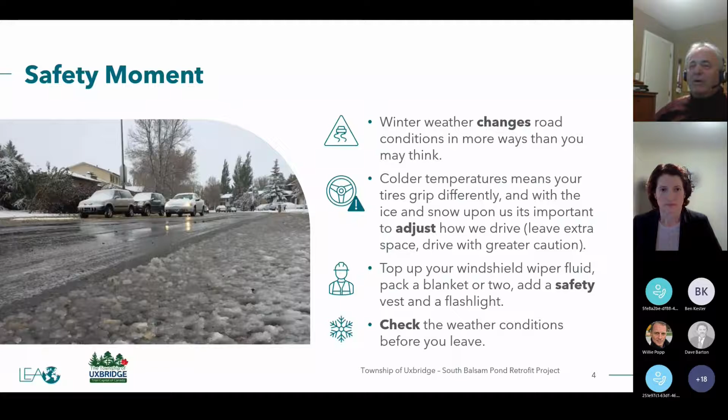So we'll briefly go through the project background, the goals of the project, and a summary of the proposed works. The site is located south of South Balsam Street, east of Turner, and north of the railway corridor and the Uxbridge Brook. There are walking paths through there, and the facilities were built as part of the subdivisions. There are two subdivisions, east and west of Turner, built in the 90s.

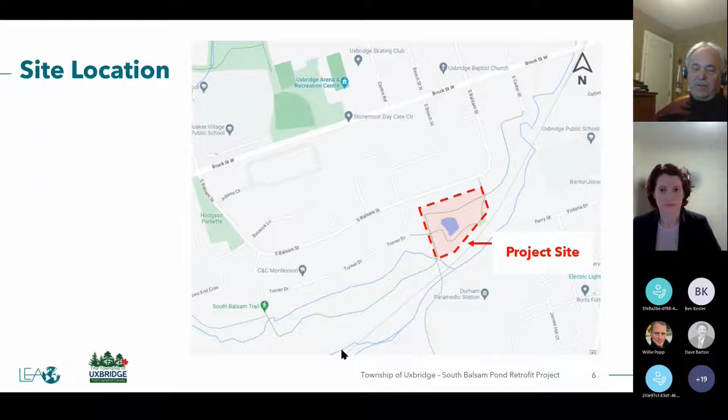So this is the existing condition. There are 3 ponds. Water comes from the subdivisions through the 2 walkways. There are 2 quality ponds, this is one and this is the other. And then there's the stormwater management quantity pond. The gray shows the water level when we did the survey, but it actually covers all this area, so it's quite large. And as said, it was built in the 90s.

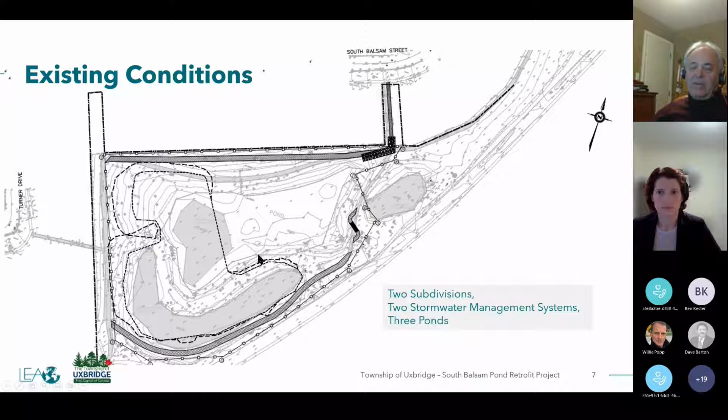A little bit more detail. There are walking trails through the area. There's a little abandoned playground along the rail corridor. The boundaries are the backs of the properties on South Balsam and Turner, and the rail corridor here. The inlets to the ponds are from Turner down the walkway. There's a pipe that goes here. Under smaller storms, the flow goes around that quality pond and then overflows into this larger quantity pond.

And from South Balsam, it comes down the pipe down the walk path and into this quality pond, which then overflows into the bigger quantity pond, and that is released through a pipe up to the Uxbridge Brook. That's the existing conditions.

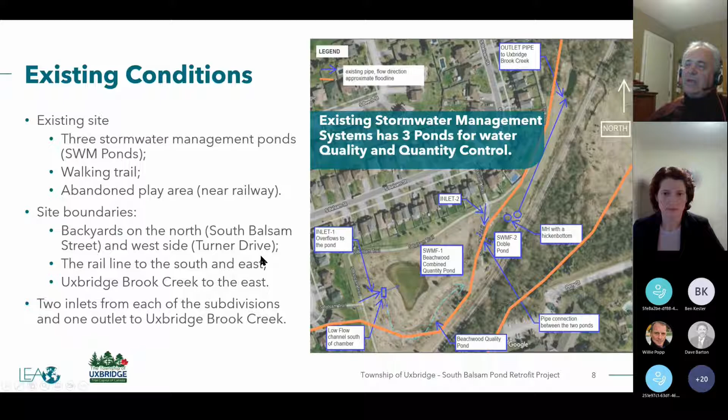So the goal of the project is to improve the stormwater management system, to bring it up to today's standards as things improve in regards to how we treat water for quality and quantity controls. We're also updating the stormwater management facility to reflect climate change impacts: the larger intensity storms, more water, and how we deal with that, while still maintaining the quality of the water before we release it to the brook. And then we have to keep it inside the township's budget.

So I'll hand it over to Christina. She'll go through the project details. Christina? Mark, if you can please give me control as well, just to point out so people can see what we are discussing. Okay, thank you.

So as Mark mentioned, we are designing this new SWM facility to provide a little bit less space than the existing pond. And this is the footprint of the proposed pond. It will take out the space of the existing quality pond, and it will have its own quality control cell on the north and the quantity control cell on the south. The existing inlets will be maintained to a certain extent. The inlet from Turner Drive will be maintained up to the existing chamber just west of the pond. And the new inlet pipe will be connected to the pond quality cell.

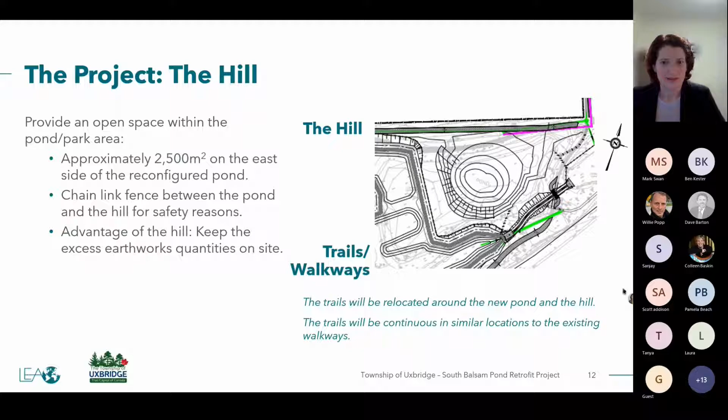The project will also include the addition of a hill on site, and this is located on the east side of the new pond. The area is about 2,500 square meters, and a new chain link fence will be installed on the edge of the proposed pond for safety reasons. The advantage of this hill is that we will keep all the soil that will be taken out in order to make the proposed pond, and all those quantities will remain on site. As mentioned previously, we will relocate the trails, and there will be a continuous path throughout the site with additional areas for the community to enjoy that space. Mark, can we move on to the next one, please? Thank you.

Part of this project, we are bringing in new storm pipes from South Balsam Street as well as Turner Drive, and they will carry the flow towards the new pond. And also a new outlet structure will be placed in order to maintain the allowable release flows into the municipal infrastructure. In addition, all the catch basins in the subdivision, the divide will be south of Brock Street. They will be equipped with catch basin shields. So these are some inserts that will be placed in the catch basins that will capture the sediment. So less sediment will be conveyed further into the pond, and that will result in less cleaning required for the pond and improved water quality. Mark?

Thank you. In terms of environmental considerations, LEA undertook an environmental study to determine what are the species at risk and what the environmental constraints are within the site. And there will be vegetation removal required, and Mark will discuss that further on. But we are expecting about 15 meters of vegetation to be removed beyond the SWM pond footprint, and the vegetation will be restored after construction is completed. In the existing condition, based on the environmental studies undertaken, there were 2 potential species at risk that were identified within the site.

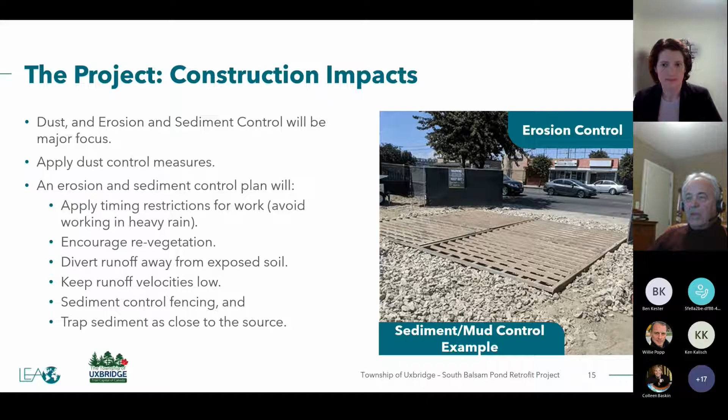And then the perimeter fencing of the whole site will be double fence sedimentation controls with sediment traps to keep everything on site. So the first phase of the construction is the removal of the trees and shrubs, and that has to be done before April, as Christina said, to avoid the breeding season.

This is in regards to the trails. So the trails will be closed at South Balsam, Turner, and then the access points from the abutting trails. There's a number of other access points, not just from the streets, that will also be signed, and they'll be signed in advance so people are aware what's happening.

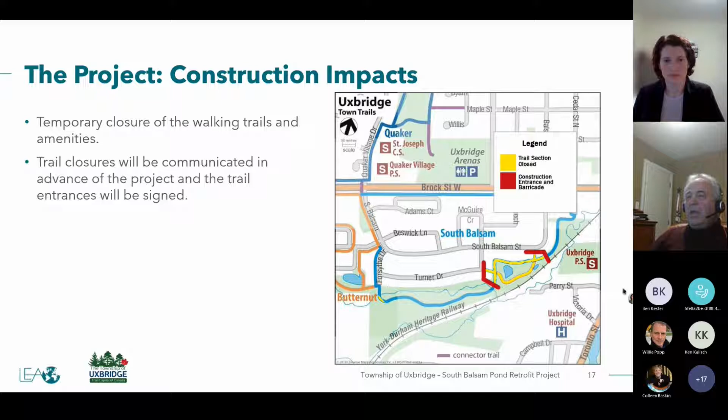Another impact. So this is from South Balsam into the stormwater management area. This will be the contractor's access. We're working with Canada Post to relocate the mailbox, and it'll be very close by to this location, so that service won't be disrupted.

And in regards to construction activities, the working hours for the contractor and the related noise of construction, the township has a bylaw in place for that. It's Monday to Saturday, 7 a.m. to 7 p.m.

Excuse me. So the next steps of the project. More or less we have completed the design. We have to get approvals from the Lake Simcoe Region Conservation Authority, and we expect them very shortly. Once those are in place, we apply to the Ministry of Environment, Conservation and Parks for environmental compliance approvals, and then at that point we're ready to go to tender.

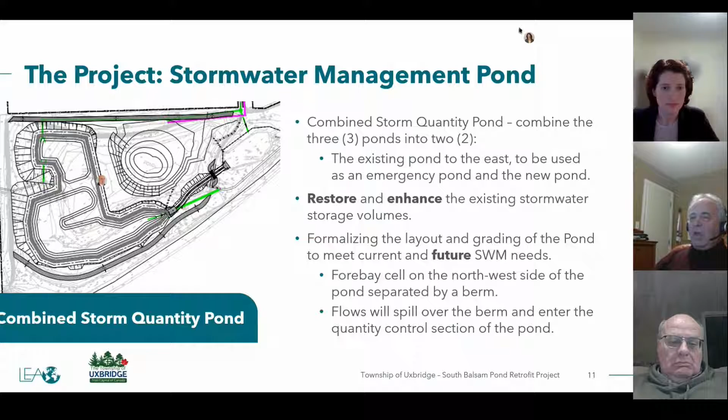Sorry, this is Dave. Before we go to the next one, Colleen, can we go through where exactly the trees will be removed on this diagram again? And maybe zoom in a little bit so it's more obvious? Well, I don't have all the trees, but it's this whole area.

So there's a fair number of trees. So again, just with that, along the property lines, which is probably where people are most concerned, is there a way that we can limit the vegetation removal close to property lines? We could probably look at that. I don't think South Balsam will be a problem.

You can see how we just have to tighten up the slopes a bit, Christina, and stay a little bit away from the backyards. Yeah, we can look at adjusting this where possible, but it's got to be a certain distance away from the pond and so on. But we can try to make improvements where we can, but obviously there is going to be some vegetation taken out. So I understand their concerns.

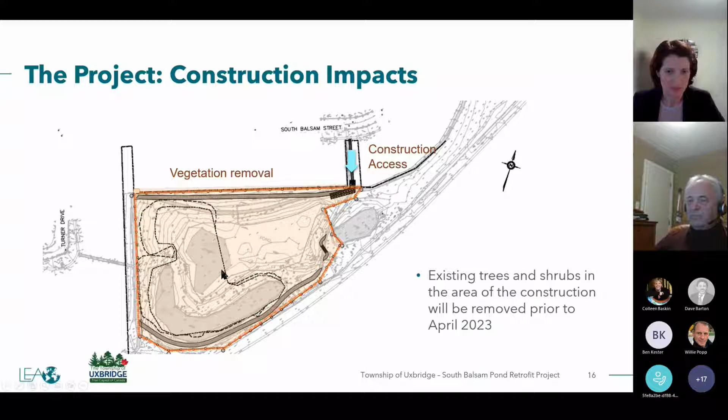And there's one question on how deep the pond will be, and wondering if there's a picture of what the space is supposed to look like when it's complete. Christina, the depth of the pond? Yes, the pond is 2.5 meters deep. But the top of the pond, as it is right now, will be the same. We are deepening it at the bottom. And for the rest of the question, we don't have right now a visual for how this is gonna look like. We have the engineering drawings that show the footprint of the pond and the hill. But we can work on providing something later on.

So we will have a specific email address set up shortly for this project. So if you want to check back on our website in a couple of weeks, we should also have a web page set up specifically for this project. We'll put the slideshow on the website with the email address. So if you have any questions, you can email the address and we can answer it. We can also post the planting plan when it gets approved by the Conservation Authority. We can do that as well in the next couple of weeks.

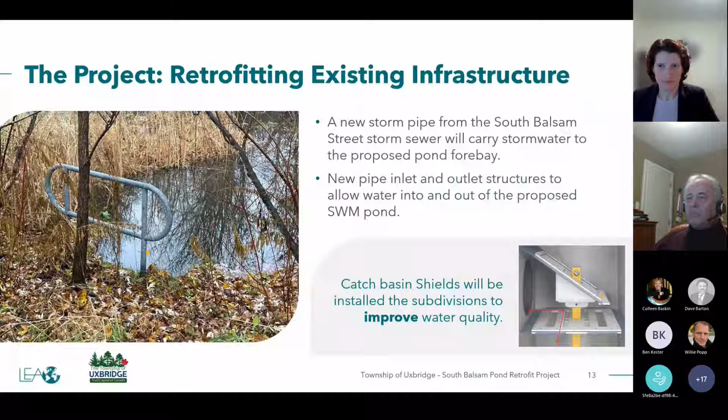There's a question about what the main purpose for the project is. Is it to increase capacity to deal with storm surge, or was it because the pond basins aren't able to deal with the water? It's... so there's more because of climate change. There's more water, and

the existing systems were built in the 90s. So the techniques now help us control the water better and improve the water quality, the release of it to the environment. So I'm not sure if I answered the question, but it's an improvement for the whole system. The system's improved in many different ways, and plus it gives that space where that hill is, because instead of having the ponds all over the place, it's confined into one location.

It's Willie here. We also had some residents in the past term that were providing concerns about it back to Township, to Public Works and myself. And my understanding is that the pond wasn't fully operating as it was engineered, to his point, back in the day when it was made. So that's why this project was put in place, so that we could ensure that it was operating properly as well. Thank you.

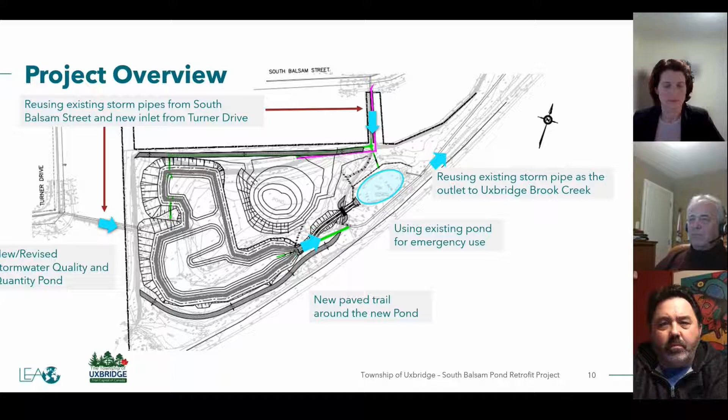There's a question about the timeline for the construction. When will it be done? Late fall. That's what we anticipate. It's dependent on getting the approvals in place so the township can tender the project. But that's the plan. Sorry, however,

if for some reason we're delayed in getting the approvals and it doesn't allow us to start, then we still have funding. We applied for a grant and got a partial grant for this, and that funding's good till 2026. So hopefully we get it done this year, but if the approvals take us longer than we anticipate, there's a possibility it might be next year.

So there's a question about the replanting and if there's any ecological engineering plan to promote species diversity and support native plants and animals. And another question that's similar is, could this hill be naturalized? It could be naturalized for sure if that's what the residents want. If we naturalize it, then it doesn't become an area for recreation, bike riding or anything like that.

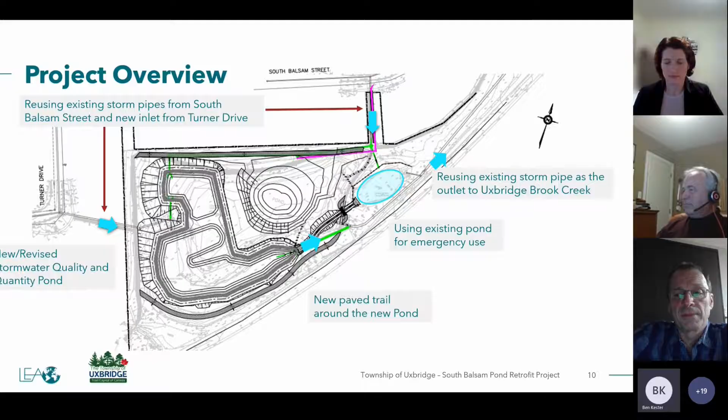Yep, and obviously, people may have very specific questions related to their property, and we can address it specifically with the detailed engineering drawings. So we can do that through the questions through the website. Yeah, I'm not seeing any new questions coming up now. Great. Okay, so we'll endeavor to get all that stuff up on the website in the next couple of weeks so that you can have a closer look at the cross sections and provide us with any questions or comments that you have going forward.